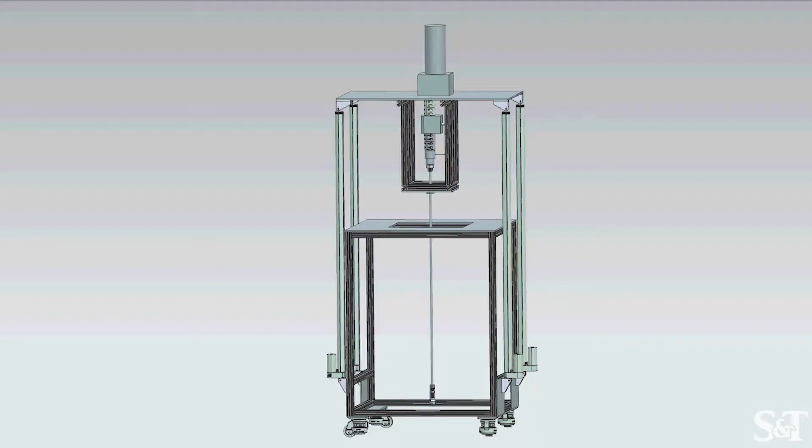The overall rig design is about the same as last year with a few major changes. Again, the vertical motion will solely be controlled by linear actuators. Due to misalignment issues seen last year, they have each been upgraded to actuators that provide position feedback so they may be precisely individually controlled.

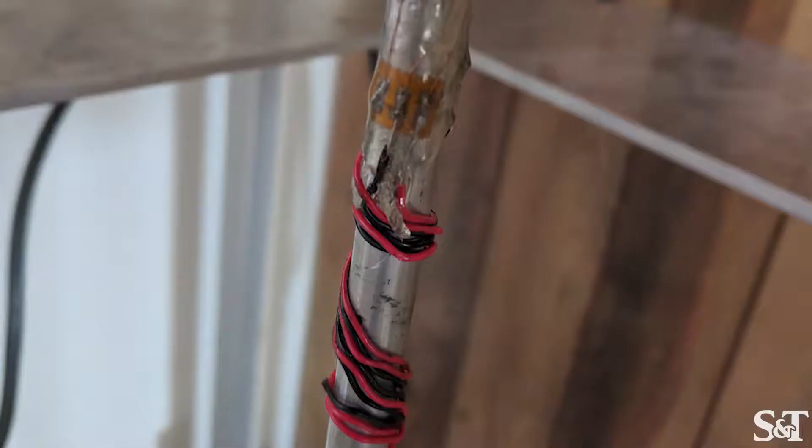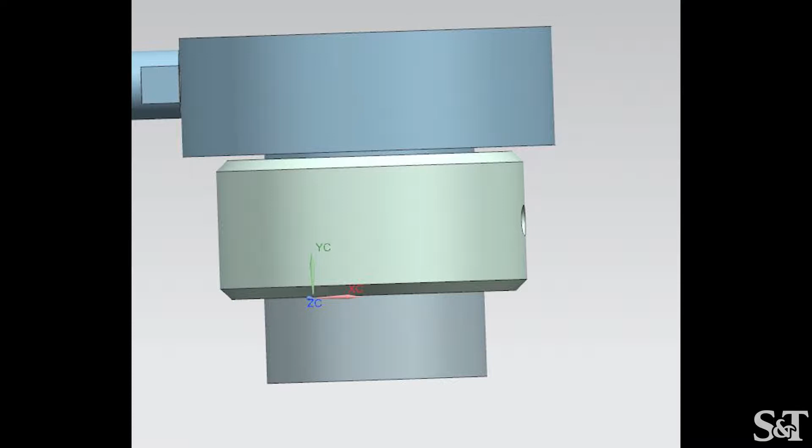A challenge seen last year was our measurement of weight on bit with strain gauges attached to the drill pipe. This year we have eliminated them from our design entirely and opted for a through-hole load cell design. This will be mounted to the travel block and measure compression seen from the drill pipe when it contacts the rock. The load cell assembly consists of the sensor, thrust bearing, and shaft collar, all contained inside a machine casing.

The shaft collar will be fixed to the drill pipe, and when the bit makes contact with the rock, the collar will apply a compressional force through the bearing to the sensor to obtain an accurate weight on bit measurement. As for the torque, it will now be calculated from the motor's efficiency, current, and voltage.

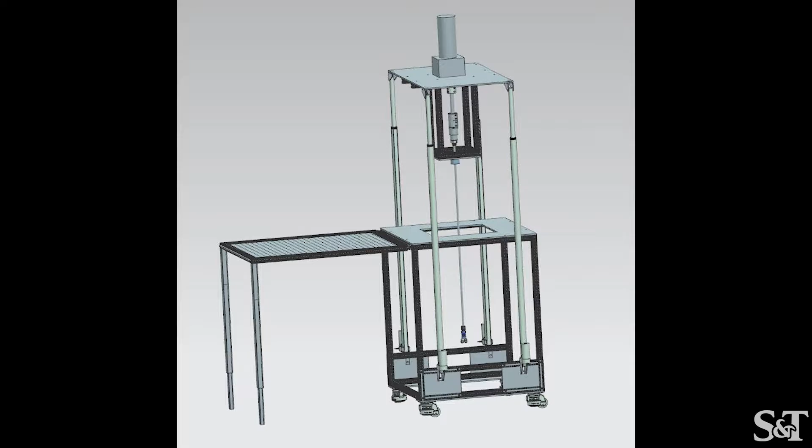To make a temporary space for electrical components while drilling, a foldable electronics table was also designed out of the same T-slotted material and a pegboard surface for easy anchoring. The legs are made of square steel that will allow it to easily collapse and be folded.

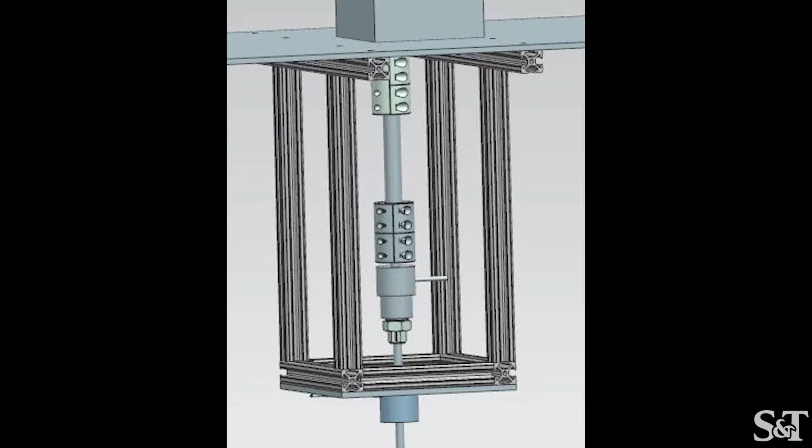On a safety note, we will now have plexiglass shielding framed inside of the T-slotted aluminum around the entire lower half of the drill as well as the traveling block, thus preventing any risk of injury from flying debris or contact with the rotating shaft. Lastly, there will be a hazard light on top of the drill near the motor to indicate to bystanders that the drill is in operation.

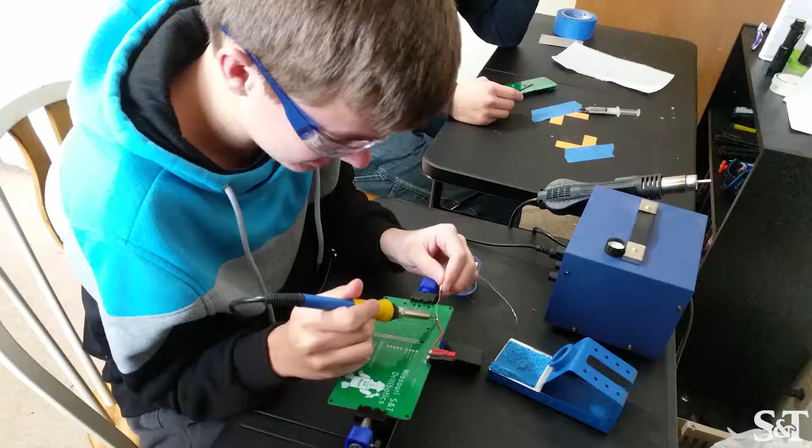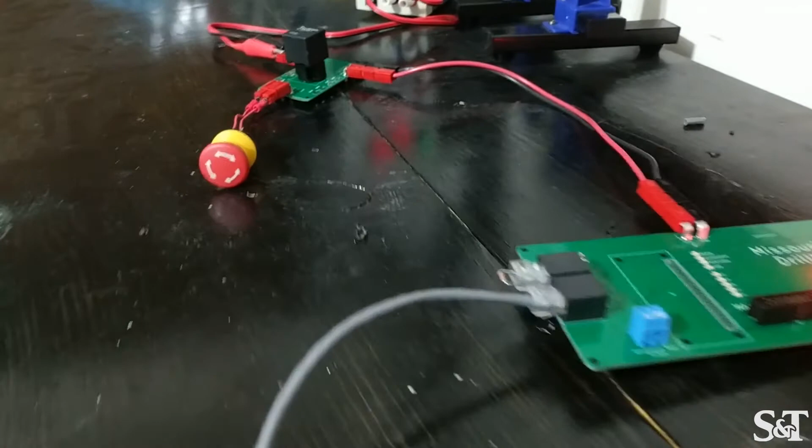The most significant change in our electrical system is our custom circuit boards. These circuit boards have been carefully designed by our team with the intent to reduce electrical system complexity and provide a solid foundation for our team in future years. Our custom circuit boards create a generic sensor network which utilizes a versatile communication protocol that allows for easy redundancy and plug-and-play expansion. This is an improvement over our previous system.

Instead of having one central location where data is collected and filtered, it is now distributed across many different sensor circuit boards on the drill. This reduces computational load on the processor that will run the automation algorithm, which will decrease our algorithm response time.

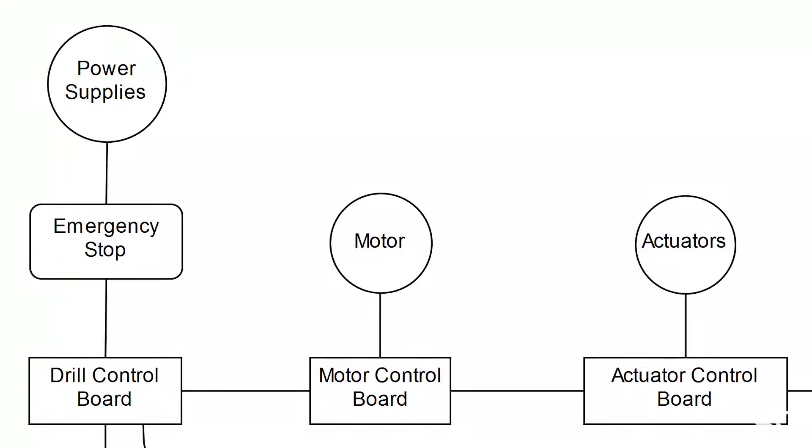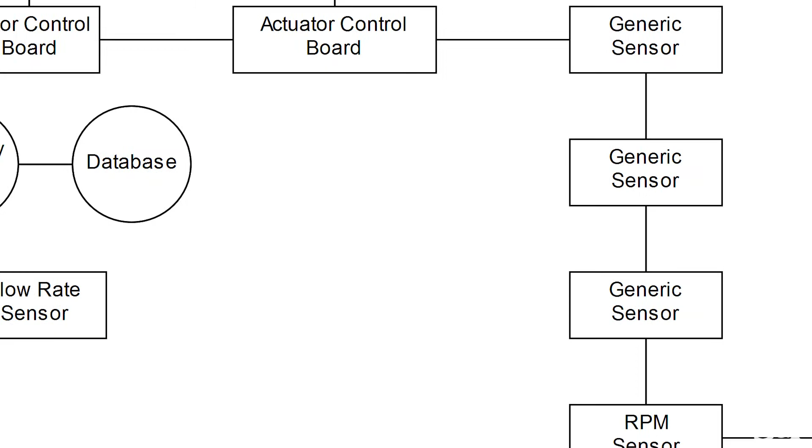With all these changes, improvements to our downhole sensor have also been made. This sensor will communicate wirelessly to the drill sensor network and will monitor the orientation of the bottom of the drill string and forces applied there. This data is invaluable to our algorithm as it can be used to detect a potential catastrophic failure to the drill string during the deviated drilling process.

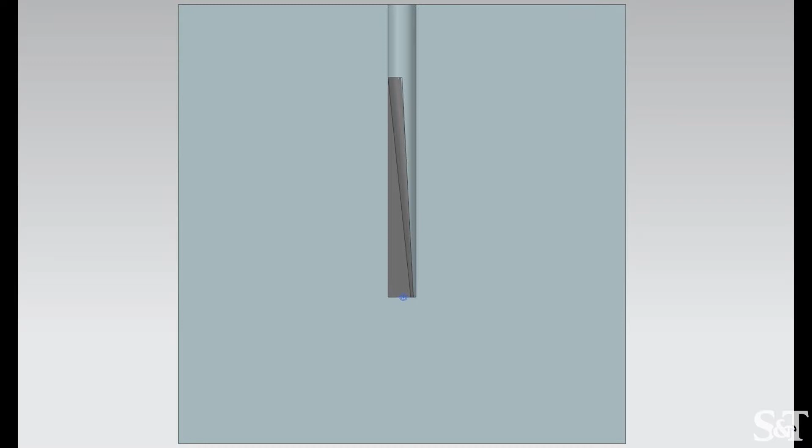Our fluid system design is similar to our design from last year. We will use a foam-based drilling mud consisting of surfactant, water, and air. The surfactant water solution will be pumped into the agitator where it will be mixed with compressed air.

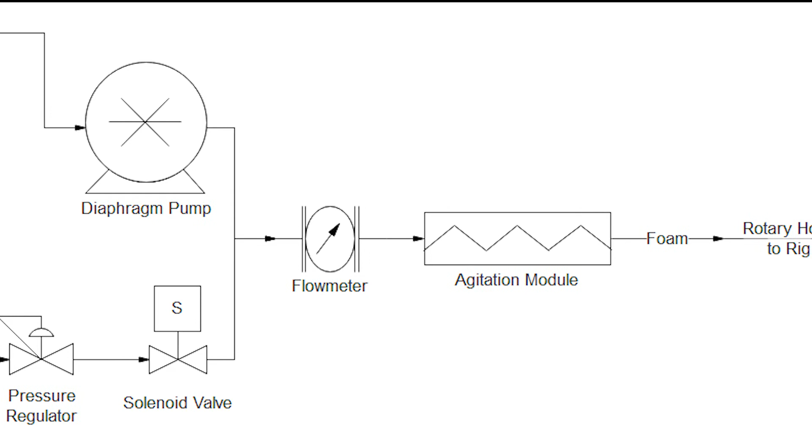New additions to our design include a flow sensor to measure and report the flow rate of the fluid. This data will enable the control boards to autonomously vary the pump rate. Our design will be able to provide the transport ratio necessary to remove cuttings of several different rock types.